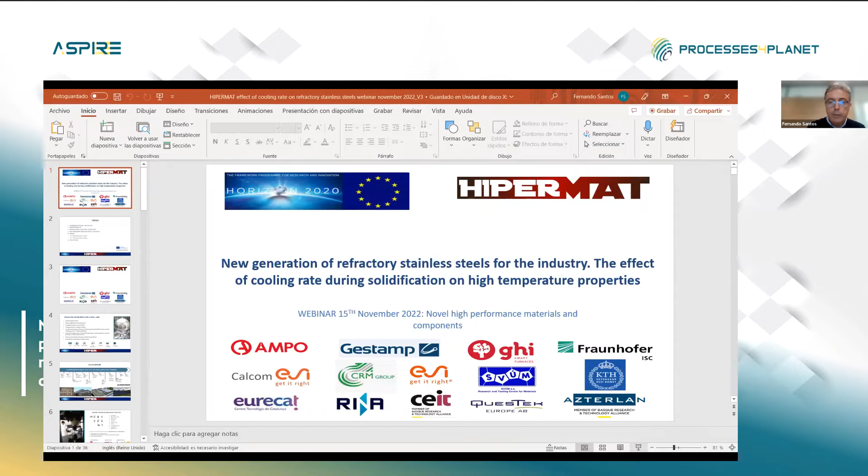We are going to present a new generation of refractory stainless steels for the industry, showing the effect of cooling rate during solidification on high temperature properties. We will go over who we are, who is Fundación AZTERLAN, give details of the HIPERMAT project, introduce the ablation technology, go over a new refractory stainless steel case study, discuss results on mechanical tests and microstructure analysis, and conclude with main conclusions.

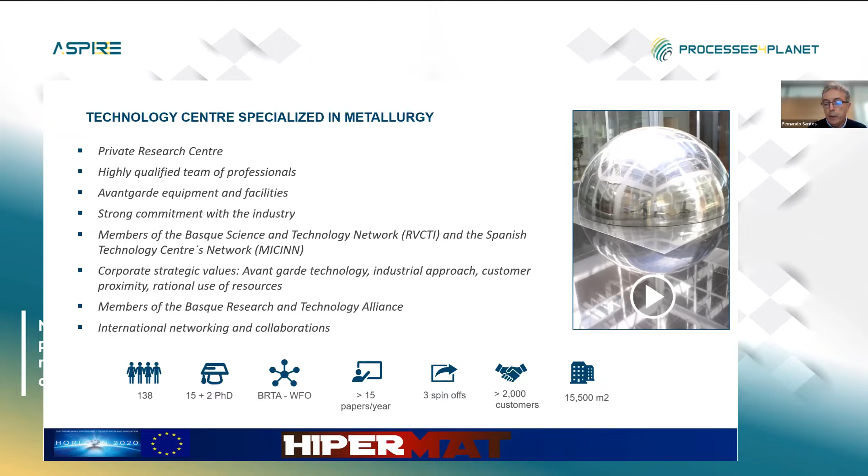Who is Fundación AZTERLAN? We are a private research center with around 138 people working here, 17 PhDs. We belong to a bigger organization, the Basque Research Technology Alliance, and are located in the north of Spain, next to the border with France. We normally generate 15 papers per year, have 3 spin-offs, more than 2,000 customers, and an active surface of 15,000 square meters. We started as a testing laboratory in 1974 and have evolved into a recognized research and development center by the Spanish government. Nowadays we carry out different activities and are quite active performing European projects.

Which are the most demanding sectors? We have a significant industrial network around us and carry out activities for sectors including iron and steel, automotive industry, wind energy, aerospace, oil and gas, urban mobility, railway, shipbuilding, machine tool, and infrastructure. We have a laboratory supporting all research and development activities, certified by different standards for automotive, aeronautic, and as a general testing laboratory.

We provide basic and applied research capabilities, mainly working on materials - we design and develop new materials. We are experts in different manufacturing processes and develop solutions for technological and control applications. We also develop transversal solutions for companies, intelligent manufacturing technologies mainly ICT tools, and work in depth on sustainability and energy, trying to solve energy and residue problems for the metal industry. We also work in other minor related areas like corrosion, surface technology, and fracture mechanics.

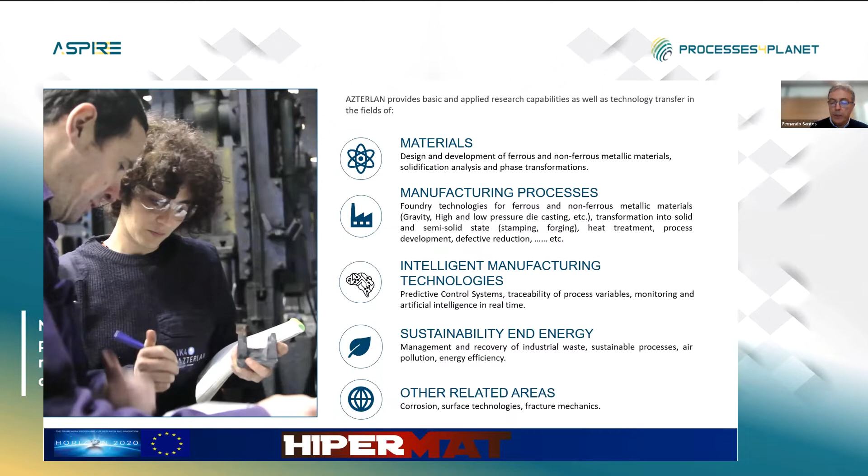Well, a quick overview of the HIPERMAT project. This project was born next to a specific study case.

It's linked with hot stamping furnaces. These furnaces have tighter requirements: they work at very high temperatures, they have to support significant loads, and the environment is quite corrosive because there are gases inside the furnace.

So currently the materials and elements inside the furnace are suffering from different types of failure modes, like thermal fatigue combined with corrosion and creep, and also wear, because they are moving and suffering quite a complex type of failure.

The project itself is a combination of solutions. It's supported by advanced design tools and aims at developing new high thermal and corrosion resistant alloys. This is one of the main aims of this topic. We are going to talk about refractory stainless steels.

We are also developing high performance alloys in terms of coatings over surfaces that are going to be exposed or suffer wear. Also critical is the control of the furnaces, and another critical aspect is the development of new embedded sensors by printing them into beams, which is the current case.

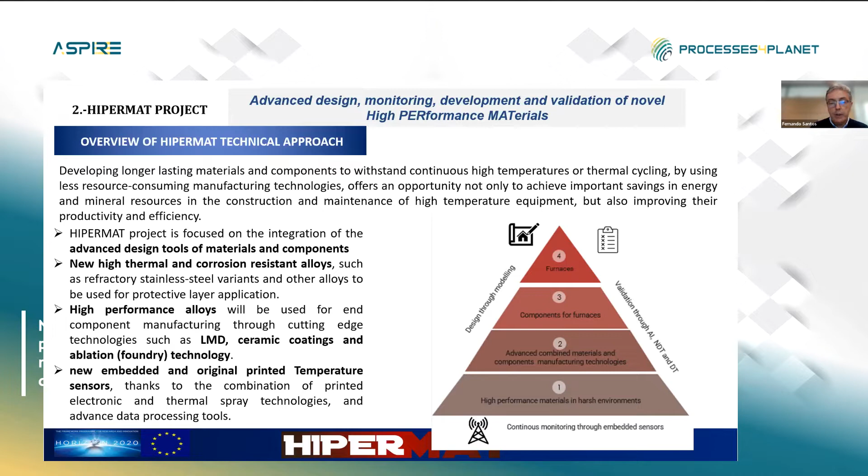Which is the main impact that we aim at having? We are trying to optimize component manufacturing processes, reducing the use of materials and increasing the efficiency of the plant, reducing plant shutdowns because of failure of different components.

Also by reducing energy and resource consumption through more efficient manufacturing technologies. This includes minimization of waste and energy consumption using modeling tools and advanced design of processes and materials, introduction of protective layers in components, reducing critical elements in bulk materials, and extending the life of these components.

Okay, and now we'll go on. I will give the floor to Emily Barbarias, who will go over the ablation technology. He is a senior researcher at Fundación AZTERLAN, developing his activities in the aluminum line. He is a mechanical engineer with 20 years of experience in the metal industry, and he is developing new manufacturing solutions for metallic components, such as ablation, which in the project we also call hydrosolidification. So I will give him the floor.

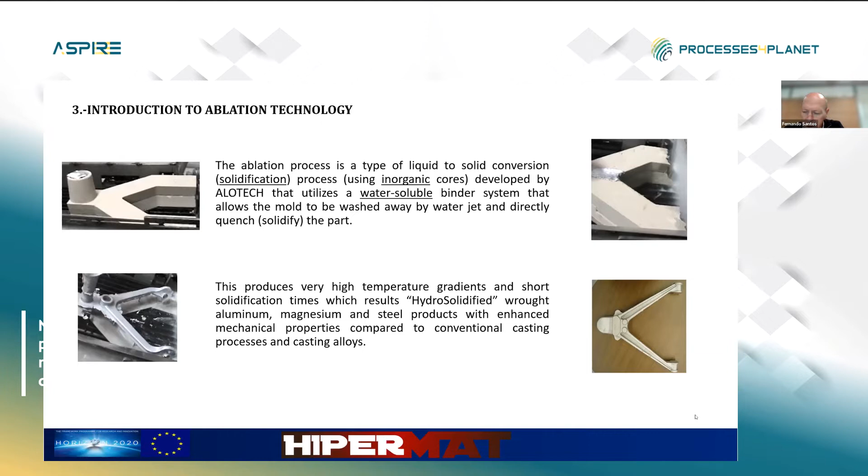Okay, by making a short comparison to clarify the ideas: in conventional casting, the melt fills the cavity, and during the filling, the melt is losing energy towards the mold. At the end of the melt filling, we have a skin of the mold that has been heated, and slowly, by the thermal transfer coefficient, this heat moves towards the rest of the mold.

So in conventional casting, the process is a compromise about the mold's properties. During the filling of the part, we'd like to have something which is adiabatic, which takes out as little energy as possible. In the opposite, once solidification starts, we would desire a higher degree of heat transfer.

So at the end of the day, in casting we have a kind of compromise between those two processes, and somehow the technology, the parts, and the geometry adapt to each other. Everybody knows more or less what geometry can be cast or not, and we go through those equilibriums.

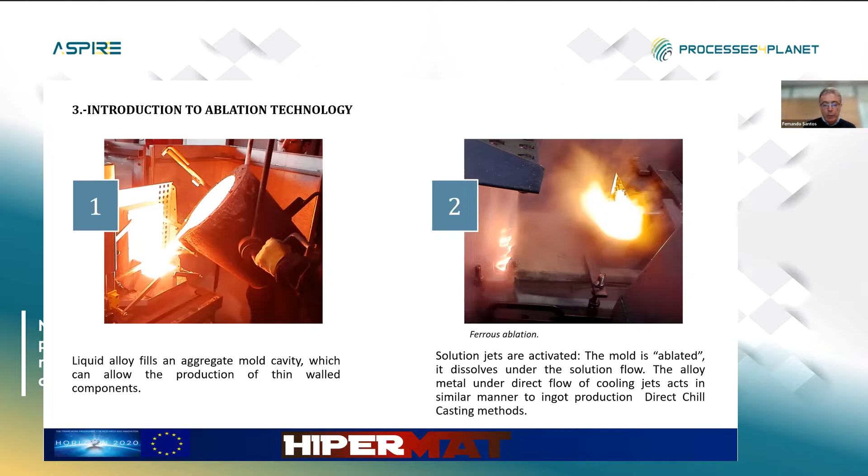So now we will move ahead. The next point is the new refractory stainless steel case study. The rolling beam is a furnace based on a technology where we have different metallic beams supported on rollers with rings. This equipment works under fluctuating high temperature conditions at the entrance of the furnace, whereas in the center we have a quite constant temperature, higher than at the entrance. That makes it so that under these conditions, failure modes are thermal fatigue of beams at the entrance of the furnace, combined with corrosion and creep inside the furnace, and combined corrosion, creep, and wear of rings.

So this is something we have evaluated, the main conditions. We are going to focus on the beam inside the furnace, which currently represents a quite regular failure mode that generates shutdowns in the plant. The goal has been to improve creep mainly and crack growth rate. These are the two main issues affecting these beams.

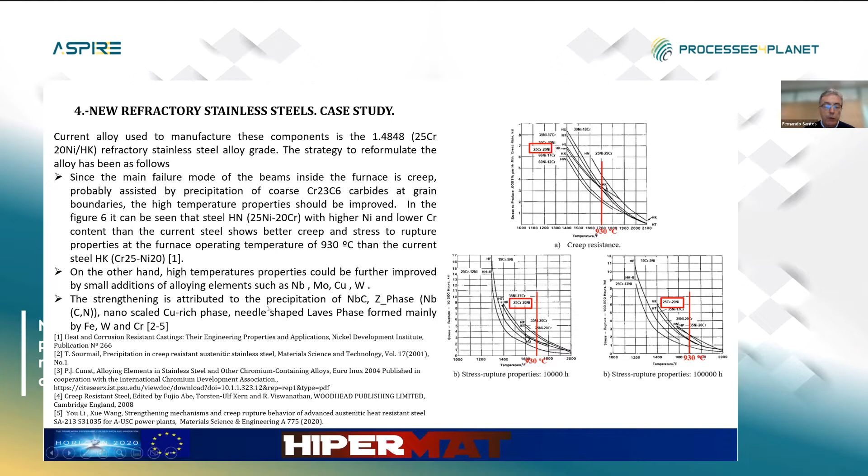When we studied the different qualities of various alloys used in the industry, we took the more standard alloy as reference, and studied how the different chemical elements, the process, and the phases affect these materials. We made a quite complex study supported by different partners, and in the end we checked that higher nickel contents improve the properties, and other chemical elements improve them with minor additions like niobium, molybdenum, copper, and tungsten. We also checked why this happens, and it is because of the precipitation of different phases or the formation of others. This has been a bit the way of working on this.

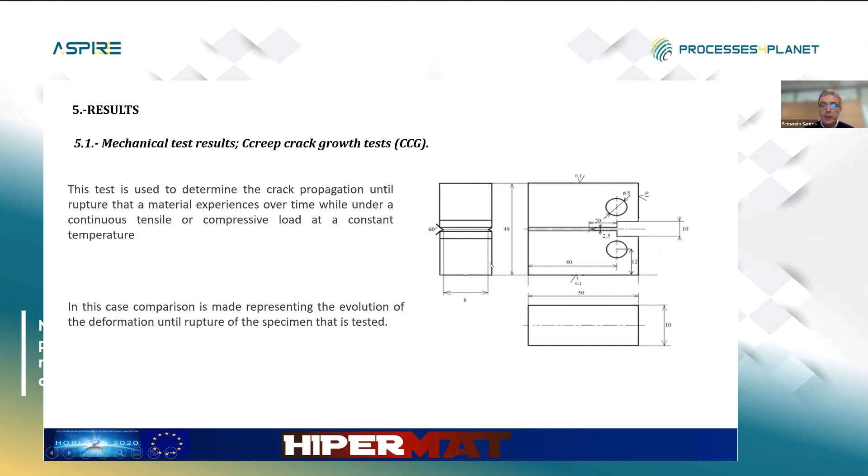We have tried to investigate and analyze the reason for this behavior. We've gone over the analysis by means of SEM, EDX, looking at the quantity of primary and secondary carbides, the morphology and chemical composition of carbides, and the segregations in grain boundaries.

What we have seen is that first we performed a stabilization heat treatment, because the condition of the alloy changes with time. If we keep it at 930 degrees for some time, there is significant precipitation of carbides. So we carried out this stabilization heat treatment.

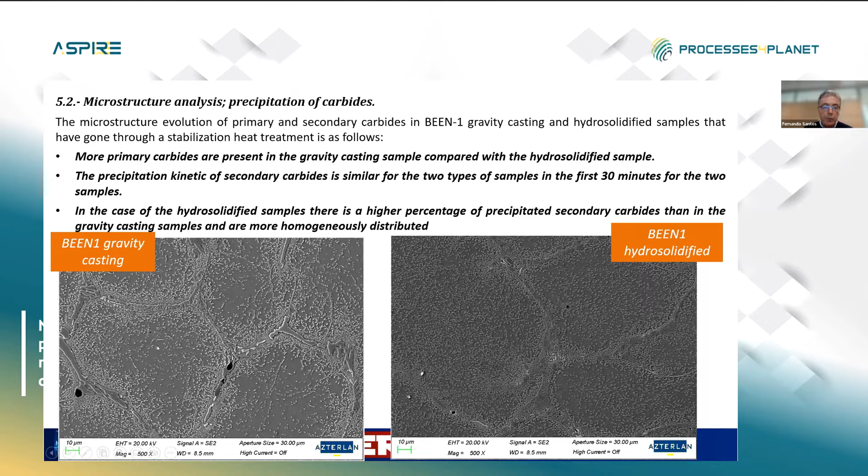Down in the pictures, we can see how primary carbides, the biggest ones, are similar in grain boundaries, but secondary carbides, the tiny ones inside the grains, are more homogeneously distributed in the hydrosolidified sample.

If we look at the morphology in the standard samples cooled down in the mold, we see these blocky type carbides in grain boundaries, whereas the shape of carbides changed completely in the hydrosolidified samples. It looks like a fishbone appearance.

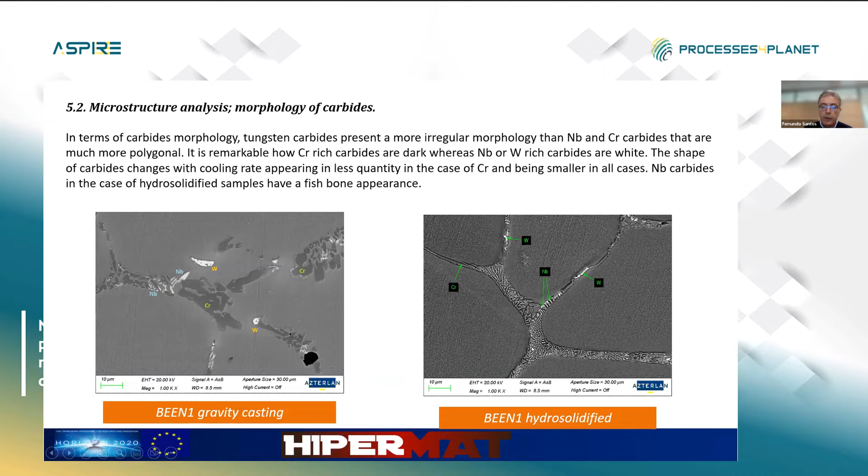They are tiny, and they are better distributed. This is quite significant.

The chemical composition of carbides is also slightly different. We have carbides richer in elements like chromium, niobium, and tungsten in the case of gravity castings compared with hydrosolidified samples. This makes sense, as we have less segregation in the case of hydrosolidified samples.

We made line scans to check the segregation. We found that chrome is more segregated in the gravity castings, whereas it's less segregated in the hydrosolidified case. Carbon also is more segregated in the dendritic spaces in the case of gravity casting. And the stabilization time has no effect on the segregation.

So this is what we can see in the next pictures - these are the line scans. What can be seen is that there is lower segregation if we cool down quicker, compared to keeping the metal in a mold that cools down slower.

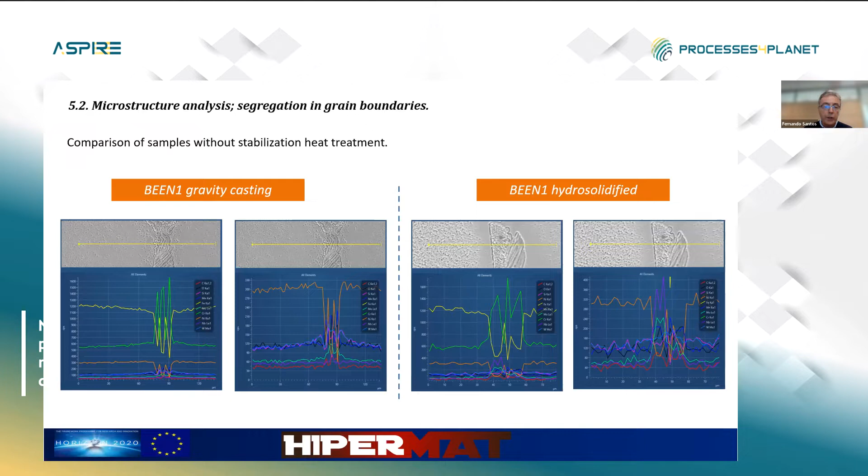So this is the general picture, and we'll go to the conclusions. Hydrosolidification has a significant effect on creep properties, improving them significantly, in both the standard alloy and the new formulated alloys.

Also, the chemical composition modification that we have performed has a significant effect on creep properties, and in fact it affects a lot on creep and on crack growth rate.

Regarding microstructure, as we have seen, it's quite remarkable how primary carbides are present in the gravity casting sample in a higher quantity compared with the hydrosolidified samples. The precipitation kinetic of secondary carbides is similar for both types of samples in the first 30 minutes. In the case of the hydrosolidified samples, there is a higher percentage of precipitated secondary carbides.

Also, it's remarkable how the different carbides are richer in the main alloying elements in the case of gravity casting compared with hydrosolidified samples. We can also see how tungsten carbides are more irregular than chrome and niobium carbides, which are more polygonal, that chrome and carbon are more segregated in the case of gravity casting, and that the stabilization time has no effect on segregation of the different chemical elements.

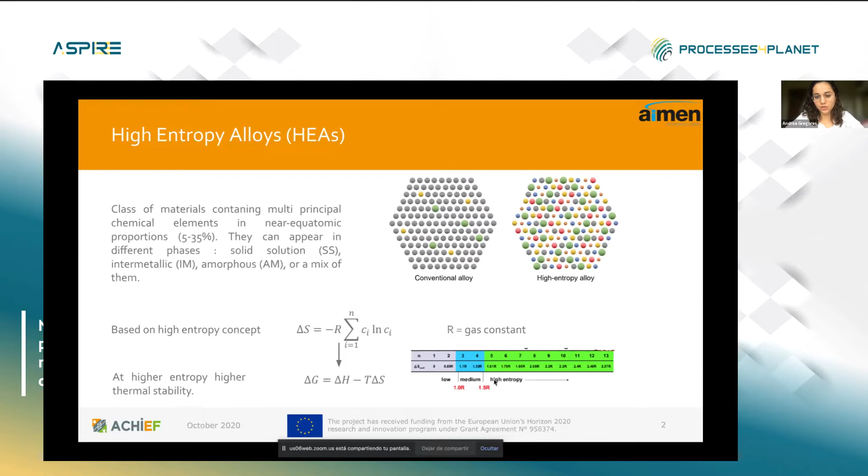High entropy alloys are of great interest for some industrial applications, such as in aeronautics, because of their strength and superior hardness. They have really interesting properties. But because they can present multi-principal chemical elements, this gives rise to a lot of possible combinations, so discovering a new high entropy alloy is really difficult.

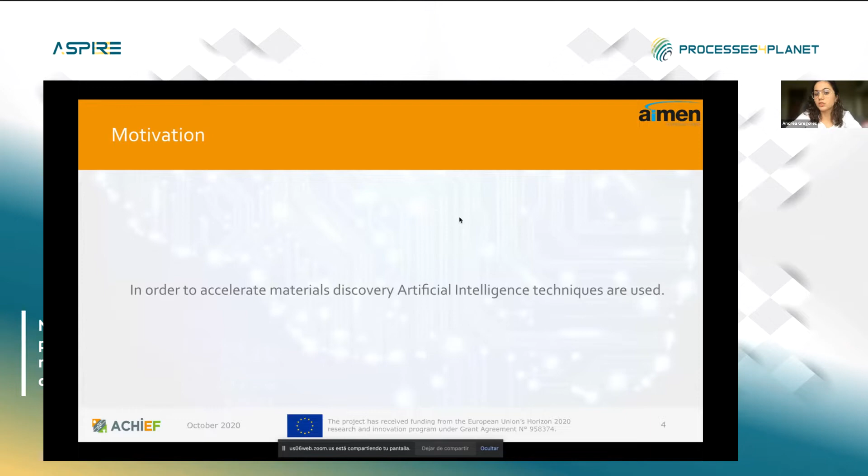Experimentally, it's really hard to deal with this amount of possible combinations to check, and computationally it's really costly. So one of the motivations of this ACHIEF project is to use artificial intelligence in order to accelerate this process of discovering new high entropy alloys.

So the methodology was as follows. First, a dataset was created based on literature. Once this dataset was finished, it was used to feed the neural network, and we trained the neural network with this dataset. Once the neural network was correctly trained, it was able to generate some candidates to be possible high entropy alloys.

But in order to check if they could accomplish the properties of these concrete alloys, a validation method was developed. In this case, we made use of databases based on density functional theory to check if they had the properties to be high entropy alloys.

Concretely, focusing on the first step, the dataset ended with more or less 1,000 high entropy alloys found in literature, and each alloy has 15 related physical features that describe its behavior. Then a column with the number of elements contained in each alloy, its general phase—which, as I said before, can be solid solution, intermetallic, amorphous, or a mix of them—and in the particular case of solid solution ones, its specific solid solution phase was also specified, which could be, for example, FCC or BCC structure.

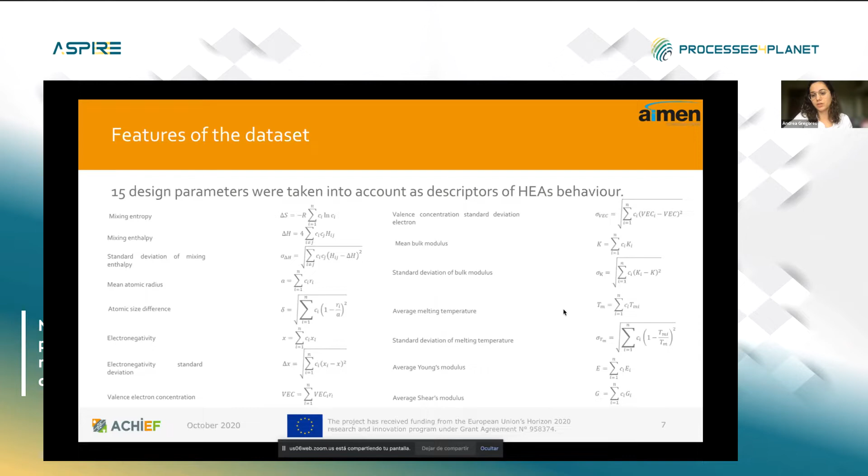So once the dataset was developed, well structured and pre-processed, everything is okay, it's ready to be used. The next step was the neural network.

In this particular case, we wanted to generate new synthetic candidates, so we made use of generative adversarial networks, which are a kind of network that contains two networks inside: the generator and the discriminator. This works as follows.

First, the generator is fed with the dataset with the real samples and a noise. With this, it is able to generate some synthetic samples, which are used as input for the discriminator.

Then the discriminator compares these synthetic samples with the real ones and determines if they are real, meaning similar to the real ones in the distributions they follow, or fake, if they are really different.

This works as a loop where the discriminator helps the generator calibrate its weights in each iteration. So in each iteration, the generator is improving the generation of better candidates. Once the neural network is correctly trained, the discriminator will not be able to distinguish between the dataset and the generated samples.

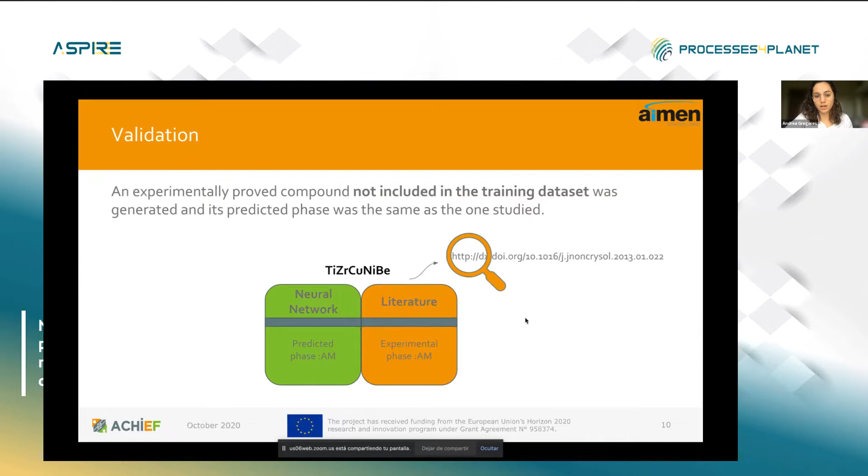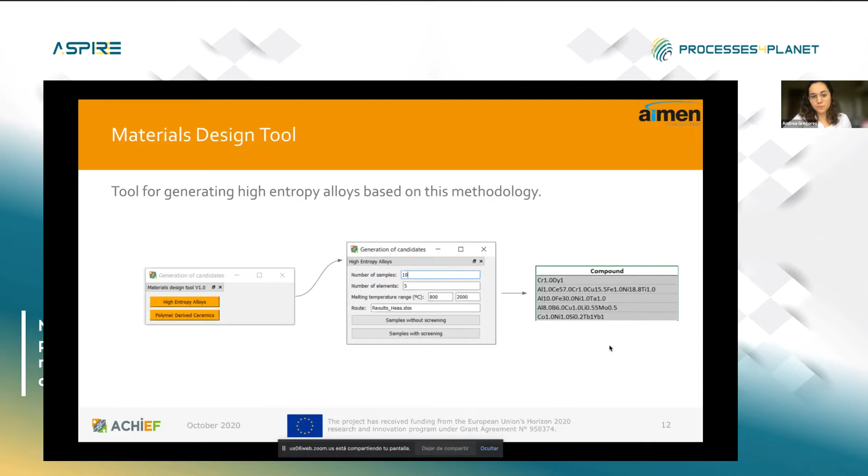Finally, in order to send our data to VTT for the simulation part, where the final high entropy alloy will be chosen, we have done a screening part in terms of making it easier for them to analyze, just not to send a lot of data.

So first of all, the first approach was to take into account 78 chemical elements, where we removed noble gases and radioactive elements. But then we did another screening: we removed the rare earth elements, the toxic ones, expensive ones, just to not make it dangerous when manipulating them in the laboratory, and also because of costs. We also removed elements with a melting temperature higher than 2000 Celsius degrees, because it's also difficult to deal with them in the laboratory. So finally, we ended with 19 chemical elements to be possible parts of the high entropy alloys.

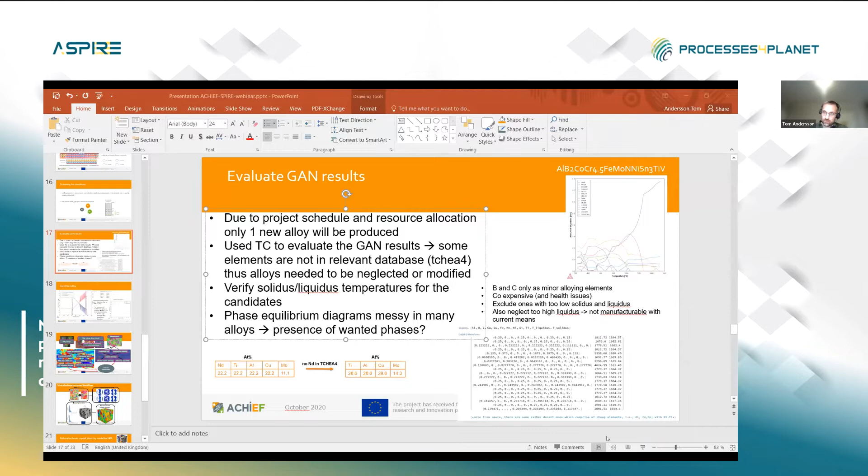So following AIMEN's neural network analysis, we'll continue with the selection of the most promising alloys. So the actual use case here is this kind of steel mill roll component, and the temperatures in the operation are up to 1200 degrees, or almost to 1200 degrees.

So we need to have this kind of high temperature alloy, and due to the schedule of this project, we only had the chance to manufacture one alloy, so we had to be quite sure that alloy actually will be usable in these kinds of high temperature applications. So we used ThermoCalc to evaluate these neural network results, and the database we used was this high entropy alloy database number 4.

But some of the elements that remained in the neural network were missing from this database, so we had to modify those alloys a bit or neglect some of them. We also used ThermoCalc to verify the solidus or liquidus temperatures for the alloys, and in some cases these alloy temperatures differed a bit from the design parameters used in the neural network. And in the end, the phase equilibrium diagrams were quite messy for some of the alloys, so those were basically neglected.

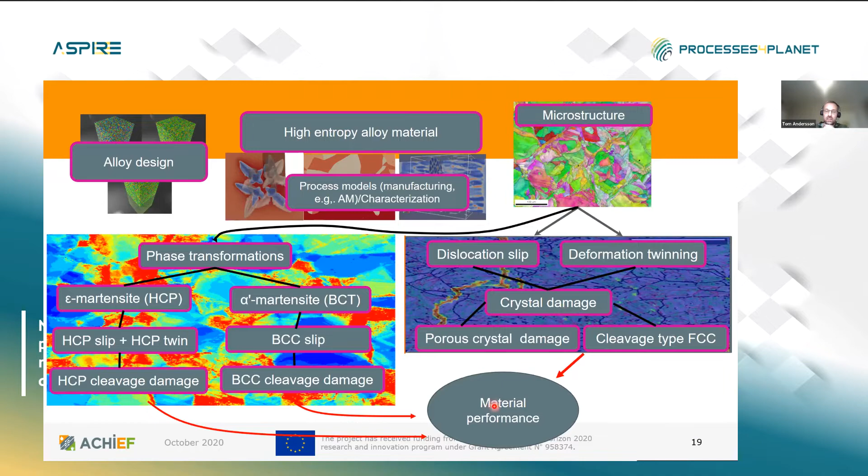So when we have the microstructure and the predicted deformation mechanisms, we apply this crystal plasticity model to get the behavior and ultimately the material performance. Here is an example of how we are going to do that microstructure.

We have the characterization data, take the orientation distribution from that, and create a synthetic representative volume element—a representative material block that has the same orientation distribution as the real material. We use that for this crystal plasticity analysis.

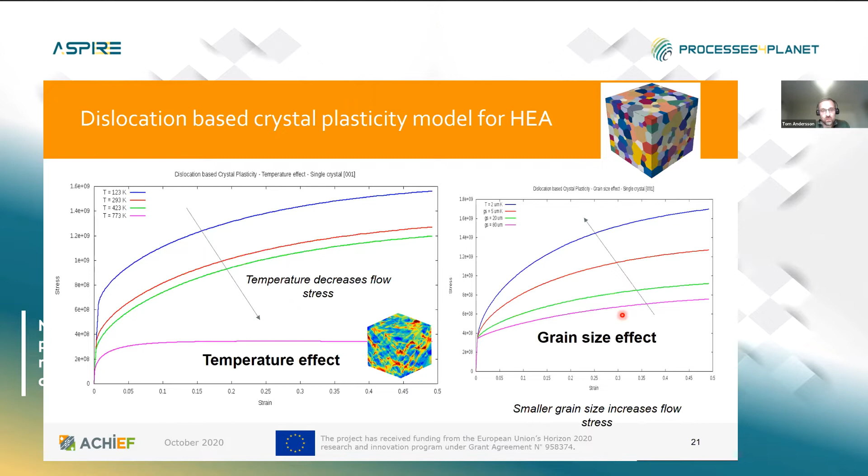Basically what we can do is see some trends, how temperature would affect it, and also the grain size, among other things. Those are the most important parameters in this case, and here's an example of what we have done previously.

By modifying the microstructure, we can see these trends of how it will affect the load carrying capacity, and in this case creep is the most important deformation mechanism. We will try to apply this for creep, to see how different microstructural features affect the performance of the material.

I think I'm at the end of my time. So that was in brief what we have done in this ACHIEF project. Thank you.

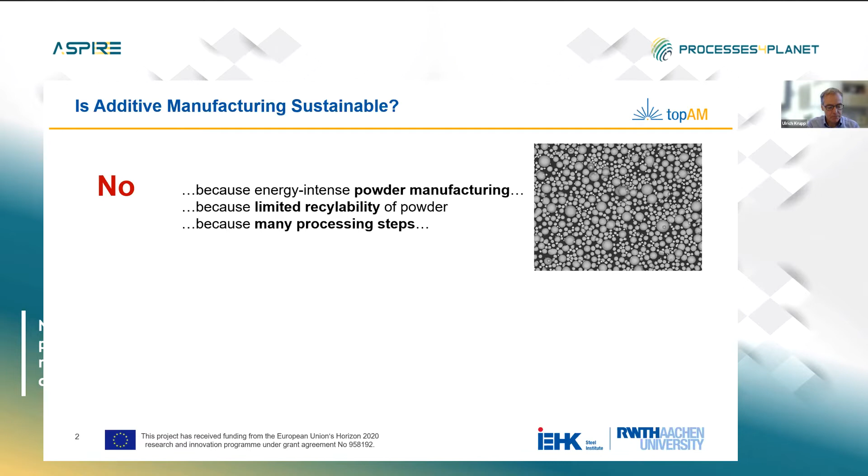We usually have many processing steps, starting from atomization, and often post-processing like hot isostatic pressing and so on. But nevertheless, I would say the answer is yes—additive manufacturing can be sustainable because of the potential for high functional integration. Think about titanium—we can achieve high material efficiency, having material only where it's needed, and lot sizes of just one are possible. That makes it economically feasible and highly sustainable.

A good example of where it can be sustainable, and where topAM, our project, comes into the game, is gas burner heads in process engineering. These gas burner heads are exposed to high temperature, aggressive environments, high gas flows, thermomechanical loading, and reducing and oxidizing environments. There is high potential for improvements in terms of increasing service life, optimizing gas flow characteristics, and increasing temperature, so that by using additive manufacturing we may end up with higher efficiency in process engineering steps.

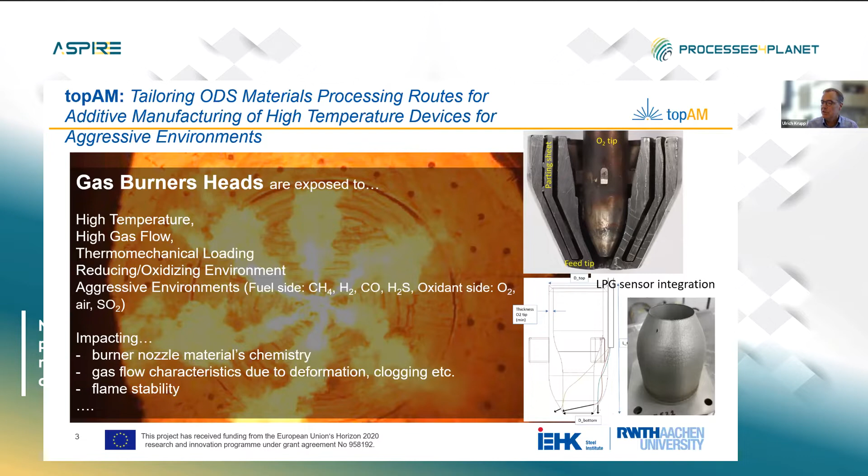These gas burner heads operate at very high temperatures—as we heard before, temperatures go up to 1300 centigrade. That is an example of our new design of the oxygen tip of such a gas burner head. What we're trying to do is integrate sensors to get data from inside the process, such as temperature, and that can be done by additive manufacturing.

High temperature stability can be obtained by creep-resistant materials at these high temperatures, different from the approaches introduced before. We are aiming at ODS materials, oxide dispersed strengthened materials. This means we have to implement nano-sized precipitates which must be of very high thermal stability, so that they do not grow bigger during service at high temperature.

That is only possible either by strictly controlling the chemical composition, or by mixing hard oxides as an alloy powder. Here you see an example of a mechanically alloyed material, so mechanical alloying in combination with hot extrusion - that is today's method to produce bulk ODS materials.

We are developing alternative approaches for additive manufacturing, which I will introduce later - freeze granulation, high energy milling, and internal oxidation and nitridation. We are aiming at three different alloys: nickel-based superalloys, alloy 602 and 699; an iron-chromium-aluminum high temperature alloy, Kanthal AM100; and for somewhat lower temperatures, alloy 400, a Monel-type alloy, which showed in a preliminary study excellent resistance to metal dusting.

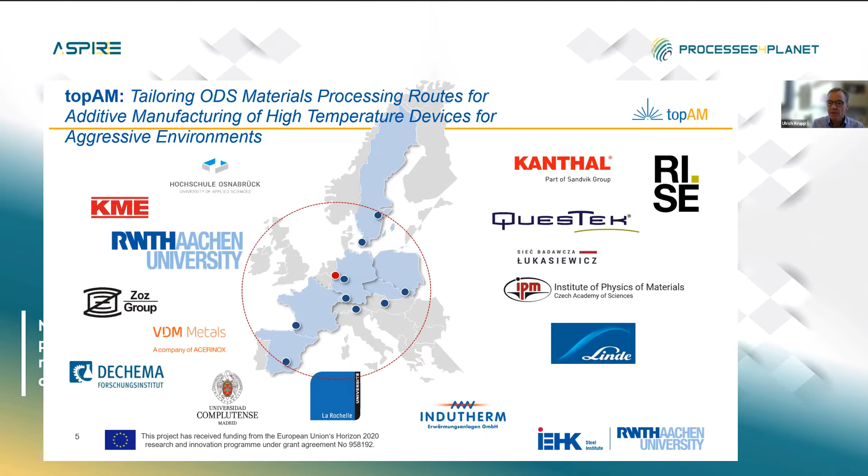This means we are able to represent the complete value chain in additive manufacturing, where we start with computer-aided design, then data compilation and optimization for additive manufacturing. We have the powder production by means of gas atomization, powder preparation - here it includes implementation of the oxide particles - then actually additive manufacturing, using laser powder bed fusion, and finally component testing.

Let me start introducing the gas atomization process. The alloy is molten in an induction furnace, and by high pressure argon, the melt is sprayed into a large stainless steel vessel, so the solidified droplets become later the powder that can be seen here - this is a high-speed camera.

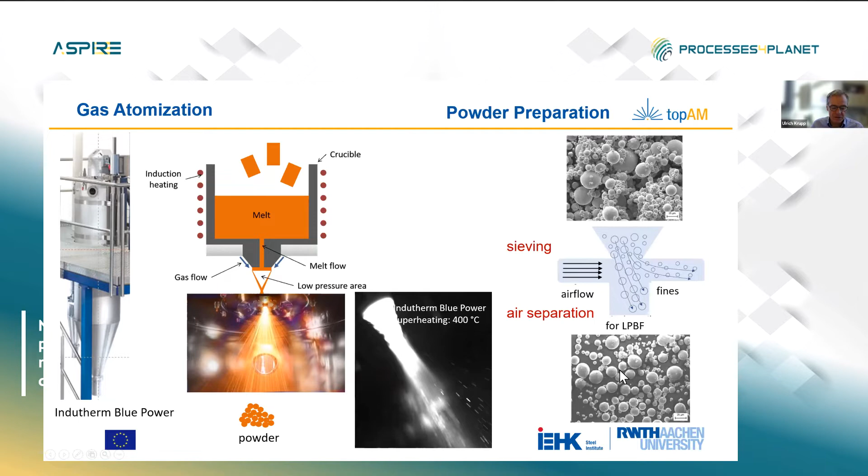Here the atomization starts, and you see the droplets which then solidify and become the powder. The raw powder then has to be prepared by means of sieving to remove the coarse powder particles, and then we use air separation to get rid of the powder fines - that gives a suitable powder for laser powder bed fusion.

Then the process starts again with the laser melting, and so the component is constructed layer-wise by laser melting. Finally, you have to remove the remaining powder, and the part needs to be removed from the building platform.

The main parameters are the laser power, the velocity, layer thickness, hatch distance, and the absorption of the laser beam. This is a very dynamic process that determines the microstructure of the material.

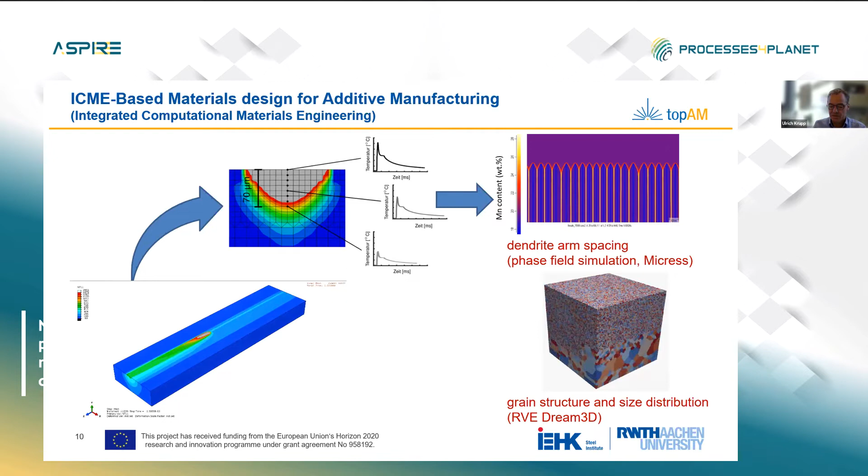The next slide shows a sketch of the whole ICME approach - ICME stands for Integrated Computational Materials Engineering. As mentioned, we use Micress to get the microstructure, while a second flow predicts the nanoparticle melt pool drift to get our particle distribution. Together these should let us predict the mechanical properties, and finally predict the performance, which is also the last work package in topAM - performance testing.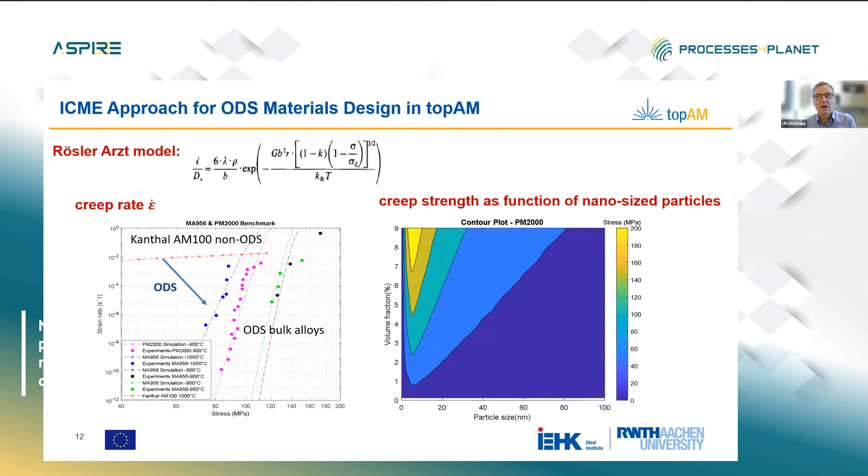And that allows us to use computational thermodynamics, and we get the volume fraction and the particle size. We see an optimum that is somewhat below 10 nanometers, so that means we really need very small particles.

So we are using three ways to get small particles in the material. The first is high energy milling of the ceramic material in combination with a metallic powder. This shows one example done with an aluminum alloy, where you see those small grains and then the nano-sized particles.

Another way we are exploring is internal oxidation and nitridation by adjusting the oxygen or nitrogen pressure in a fluidized bed system. We can obtain nanoscale alumina or, for instance, titanium nitride particles, and they stay stable when applied to the operation environment in process engineering.

The next example is freeze granulation. Here we use the fine particles from the air separation process, processed together with a binder and water, and the system is then frozen.

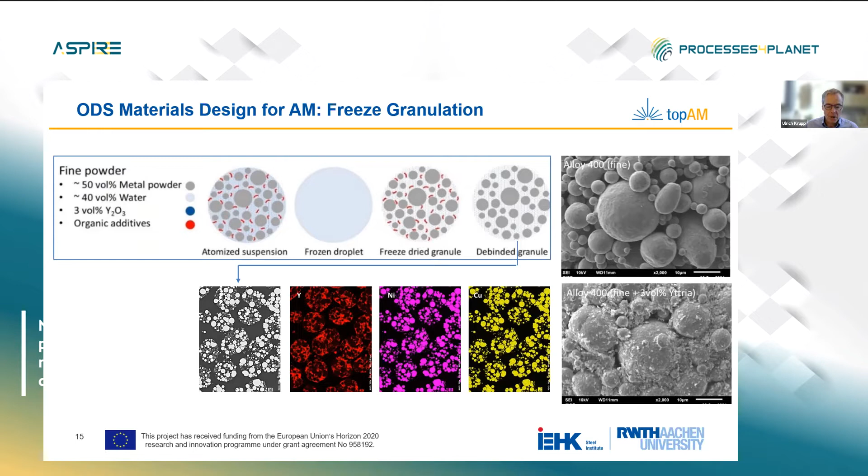Finally, I'd like to show our characterization work. We are doing creep testing and high temperature corrosion testing within the consortium. Right now our unmodified laser powder bed fusion alloys have rather the same properties as bulk alloys, but with ODS we are aiming at much lower creep rates.

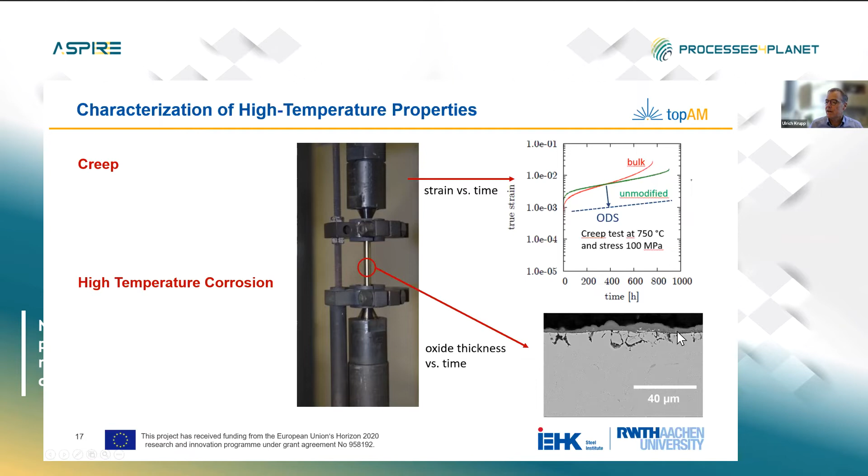At the same time we have to achieve high oxidation resistance, which is maintained in this case by the alloy 699XA through a thin chromia scale. We have some internal oxidation, and these are the two main characterization steps.

Let me summarize this short overview of what we are doing in TOPAM. Additive manufacturing can contribute to sustainability if we can improve the performance of individual components. That means we need to develop AM-specific metal powder materials, and I hope I could show you a way to systematically use ICME-guided materials design for additive manufacturing, and how it can be used for demanding components in process engineering to achieve higher efficiency and longer life for applications under extreme conditions.

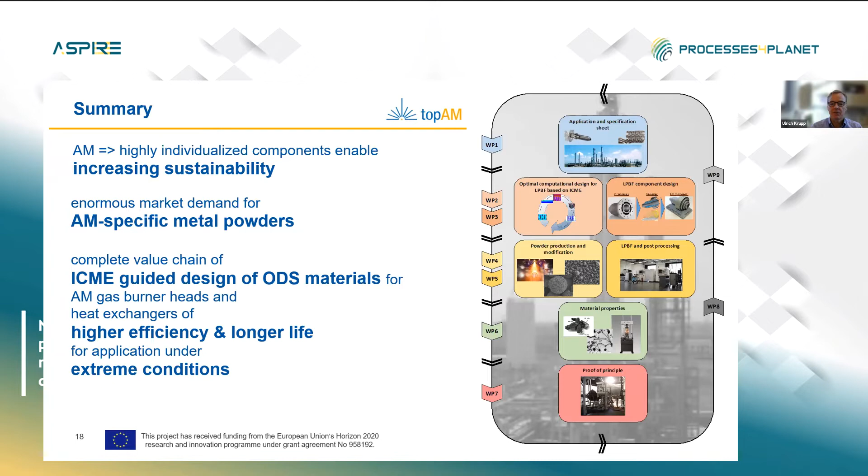With that, I would like to thank you, and also mention that in the framework of TOPAM we are organizing summer schools, which are open to the community. If you're interested, just contact us. That's the end of my presentation, thank you all for listening.

Thank you very much, Ulrich. Very interesting presentation, really.

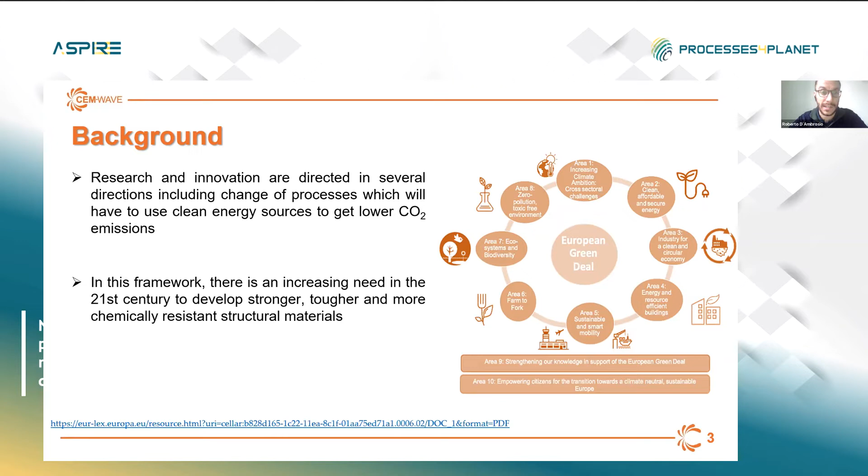In such context, research and innovation are directed in several directions, including the change of processes to get lower CO2 emissions, and this will require, among others, novel material solutions to address the more fluctuating and harsh environments expected. For energy-intensive industries, where very high temperatures in controlled atmosphere have to be reached, the industries will need to follow one or more low-emission pathways.

In particular, concerning the steel industry, the main tenet will be to use energy inputs provided from circular carbon technologies, fossil fuels with carbon capture and storage, and clean power for hydrogen-based iron-making processes.

As an example, in steel processing lines, indirect heating of products is usually carried out by using radiant tubes equipped with gas-fired burners. These components are usually based on different grades of Inconel stainless steel, which, depending on the location, are exposed to severe thermal loads up to their temperature limit.

However, due to the expected shift to renewable energy sources involving mixtures of hydrogen and biomethane up in the future to 100% hydrogen content, novel materials will be required, not only able to sustain these extreme conditions, but also phenomena like hydrogen embrittlement for metals or hydrothermal attack for ceramics.

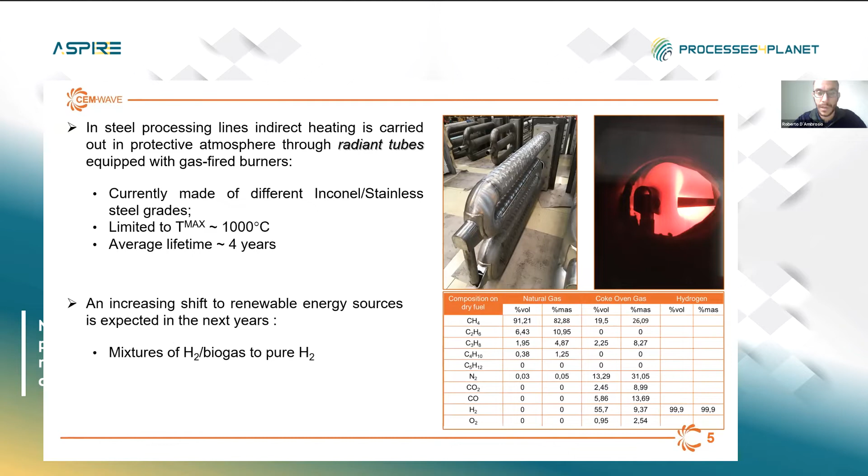In this framework, ceramic matrix composites could play an important role due to their high toughness, low density, high thermal stress resistance, and chemical inertness, which are making them increasingly attractive in a large palette of energy-intensive applications.

These materials could be distinguished into oxide and non-oxide-based CMCs, depending on the main components, namely the fiber and the matrix, which could be based either on an oxide material such as alumina, or a non-oxide material such as silicon carbide. However, due to the high raw material and processing costs, CMCs are only employed in high-end areas.

Therefore, in CEM-WAVE, our first aim is to introduce an innovative microwave-assisted chemical vapor infiltration technology to manufacture CMCs. Moreover, the final goal of the project will be to validate a CMC prototype based on a joint oxide and non-oxide CMC tube, to be tested in the relevant environments of interest for future radiant tube furnaces in steel industries.

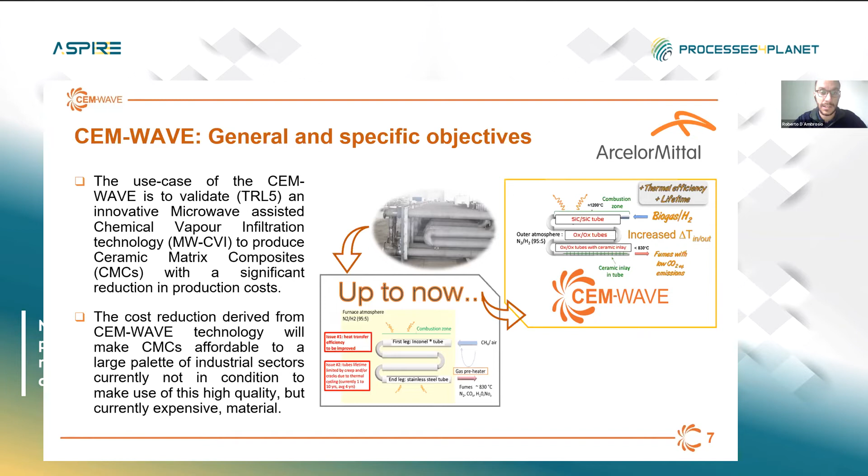Moreover, as part of the project activities, a series of tasks will be carried out to investigate more enabling technologies to favor a wider application of these materials in additional sectors. In order to reach all these goals, the CEM-WAVE Consortium gathers a team of 13 partners among academics and industries, joining all the relevant expertise in all the project fields.

I will start now by going more in detail into the microwave CVI technology. Let's start by saying that commonly CMCs are fabricated by infiltration methods. Among those techniques, chemical vapor infiltration, or CVI, is one of the most preferred, since it allows obtaining the highest quality matrix in terms of resulting thermomechanical properties.

Specifically in this process, a gaseous ceramic precursor infiltrates a porous fiber structure and reacts at high temperature on the fiber surface, depositing a ceramic layer. However, in conventional isothermal isobaric CVI, high vacuum levels are needed to favor the penetration of the reactive gases inside the preform, leading to a strong depression of reaction kinetics, with resulting processing times also of several weeks to achieve the final density.

So one of the solutions to overcome the low deposition rates observed in conventional CVI is through the application of thermal gradients within the preform.

In this framework, the usage of microwave-assisted heating is therefore an attractive alternative due to the peculiar volumetric heating mechanism, which, coupled with surface heat losses, results in an inverse temperature profile in the sample. In this way, the infiltration can start from the heart of the preform, moving towards the external surface as the density of the material increases.

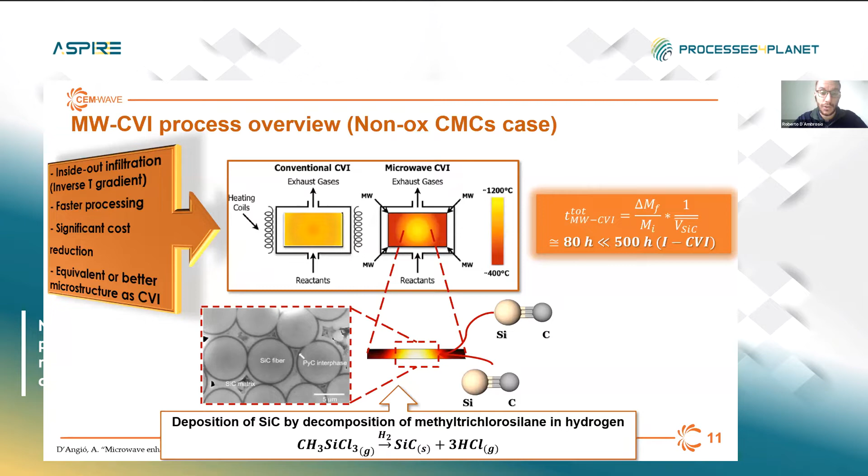Nevertheless, the application of microwave heating leads to additional challenges for the effective processing of materials. Among them, the two main challenges regard the non-uniform heating due to the formation of standing waves inside the cavity, with the resulting heterogeneous heating, and the control and optimization in operando of the microwave heating parameters, which need to be finely tuned with the material properties changing during the process.

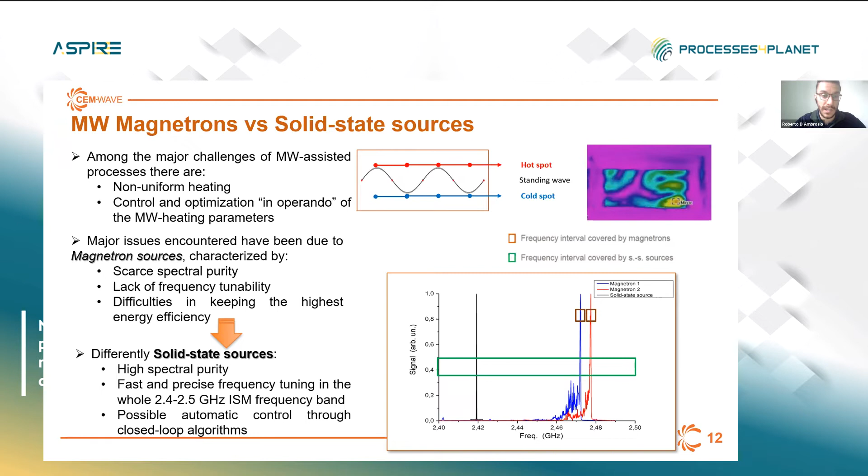Differently, with the newest microwave solid-state sources, both the forward and reflected power levels can be easily adapted into the whole frequency band of interest, with the further possibility to implement closed-loop controls in order to automate the whole infiltration process. Therefore, one of the main advancements in the framework of the CEM-WAVE project has been the design, development, and integration of these new microwave solid-state sources to our microwave CVI plants.

As an example, a first ever developed prototype able to deliver a total of 6 kilowatts of microwave power to our reactor has been developed by our partner Fricke und Mallah.

Here, I'm showing you a panoramic view of the microwave CVI plants with the solid-state sources highlighted, which have been integrated to our systems, and will be respectively dedicated to the manufacturing of non-oxide-based CMCs and oxide-based CMCs.

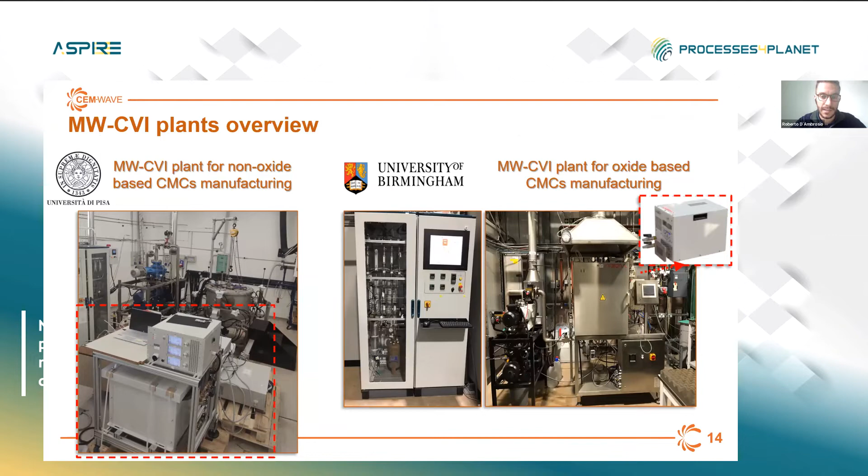Another major advantage coming from the application of this new technology derives from the solution of the coupled electromagnetic-thermal problem by rigorous numerical modeling, carried out by the Institute for Chemical-Physical Processes in Pisa. In this way, the most efficient operational conditions can be identified in terms of the resulting operating frequencies.

These frequencies have been chosen following three different criteria: the achievement of the highest energy efficiency in terms of energy deposited in the sample, the selection of modes with electromagnetic field distribution suitable for the application of interest, and the minimized cross-coupling level in terms of reflection of power in the other channels, which is inevitable when working with more than one source at the same time.

The main outcome of the modeling will be the temperature profile in the sample region as a function of the electromagnetic field frequency, determined looking for two main targets: the improvement of the heating uniformity to favor a wider densification of the material, and the tailoring of the necessary temperature gradients to achieve the characteristic inside-out densification of our CMCs.

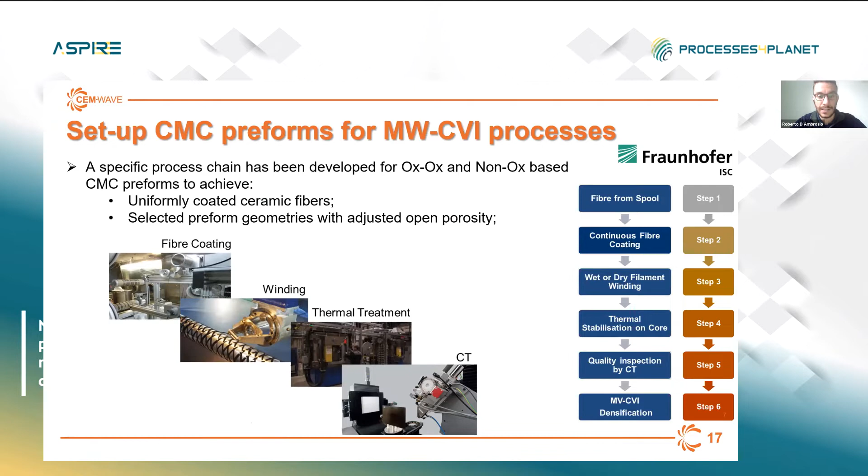Another major task regards the preparation of the CMC preforms for the microwave CVI processes. A specific process chain has been developed for both categories of material at the Fraunhofer Institute of Bayreuth, developing CMC preforms based on uniformly coated fibers with selected preform geometries and adjusted open porosity to favor the penetration of the reactive gases during infiltration.

The first step involved the interface coating of the ceramic fibers, done in a roll-to-roll process by a wet chemical route, achieving very uniform coating of the ceramic fibers in a short time span and continuously. The interface is a very crucial component for a CMC material, since by controlling the bonding strength between the fiber and the matrix through the interposition of this layer, it is possible to activate a series of toughening mechanisms under stress, resulting in its characteristic pseudoductile fracture behavior.

Here I'm showing you the coating systems which have been employed for both categories of materials.

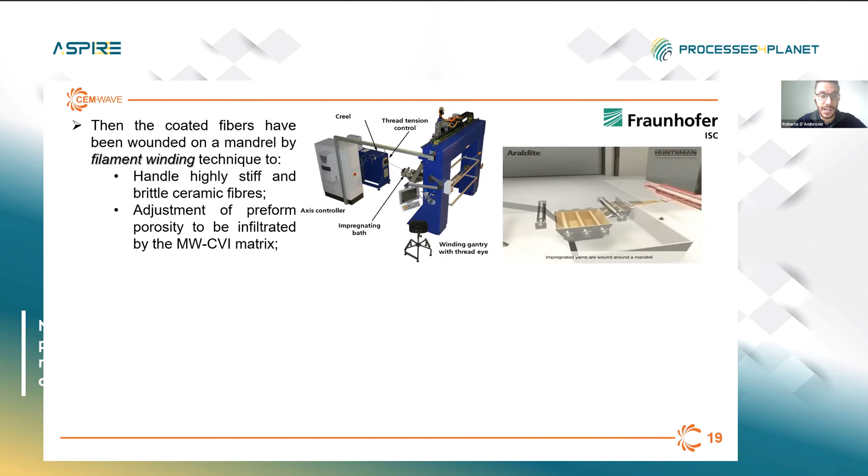Following the next step, the coated fibers have been impregnated, passing them through a bath with a ceramic slurry, and winding them on a specific core depending on the final geometry, using the filament winding technique. Why this technique? Because it allows a very fine adjustment of the fiber reinforcing architecture, and because it is not easy to handle stiff ceramic fiber rovings such as our coated ceramic fibers.

Once the textile processing parameters were optimized, the preforms have been thoroughly dried and thermally treated to remove them from the cores, obtaining the final geometries here displayed, which had tubular and plate-shaped geometries for both categories of materials.

Coming now to the microwave heating and infiltration process trials, these activities are being carried out in these months. The first results obtained from microwave heating trials immediately showed very interesting results using the latest solid-state sources previously described. These trials have been carried out monitoring the temperature profile evolution on a typical sample after 5 minutes, using single port excitation.

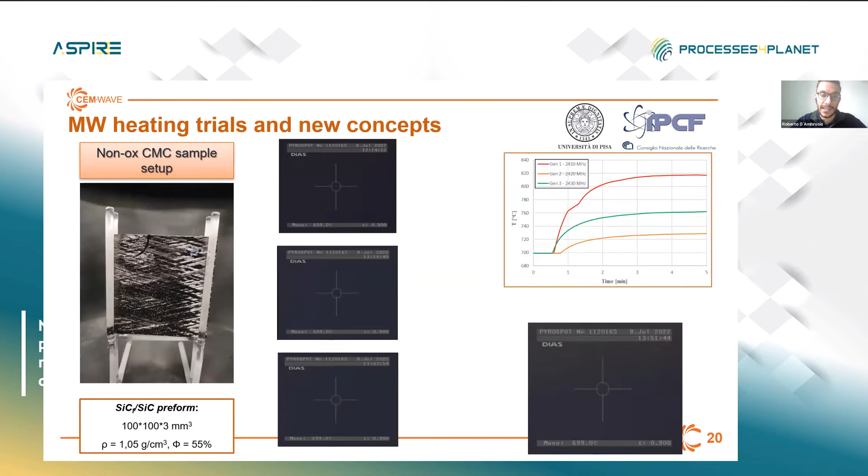As you can see, by finely selecting the operating frequency, we have been able to selectively heat specific sample regions covering from 30 to 50% of the whole material surface.

But look what happened when we combine these three conditions using a multi-port, multi-frequency approach. You can see that in this way, the heated surface of the material rises to about 70 to 80%.

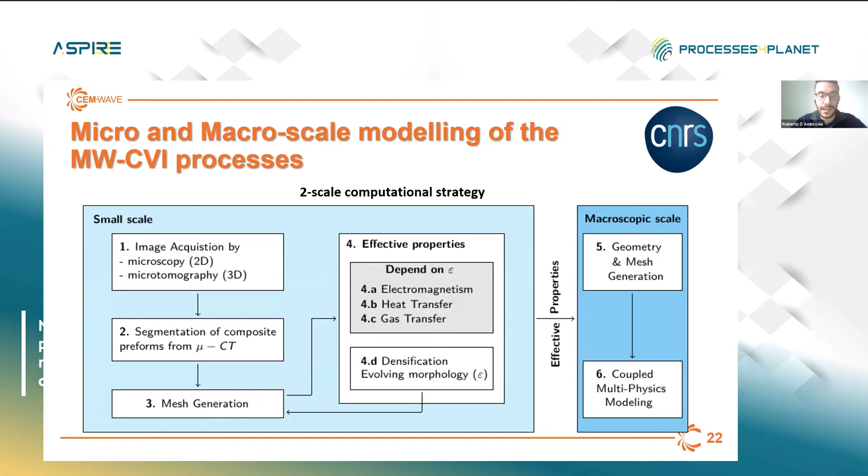Another crucial activity regarded the multi-physics, multi-scale model of the microwave CVI processes, carried out at CNRS in Bordeaux. Here is depicted the modeling strategy, which covered 2 different scales, from the intra-fiber bundle scale of tens of microns up to the whole part scale.

You can see that in order to model the microwave CVI process, we need to solve the conservation equations for 3 different physical problems. We also need to know the laws providing the change of the geometrical and transfer properties during the infiltration process.

So the first task dealt with the collection of a series of image data coming from X-ray computerized tomographic scans and SEM micrographs, which have been processed by specific tools in order to detect the precise fiber reinforcement architecture.

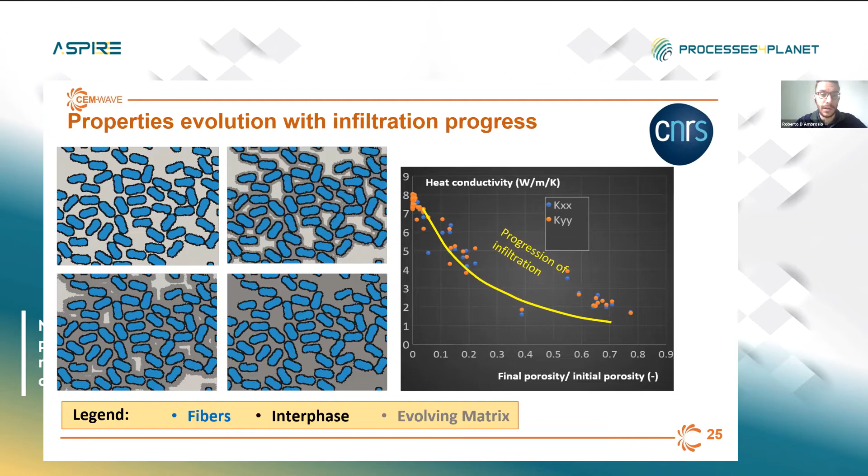Once we obtained our elementary computational domains, the physical properties have been determined in order to retrieve the effective bundle coefficients as a function of the local fiber density and infiltration degree.

So we couldn't reach the decrease of the porosity down to 0 value as we desired, since the gas gets depleted. This is something we would like to quantify in the framework of the project, since it could be avoided by precise numerical modeling.

I spoke to you at the beginning about a series of activities regarding research on more enabling technology to favor a wider application of CMCs.

Among them, if the issues related to joining CMCs to themselves, but also to other materials, could be solved, these materials will be employed much more efficiently to obtain complex hybrid structures, complementing their final behavior with unique properties, and so be applied not only in the steelmaking sector, which is our use case, but also in other energy-intensive sectors.

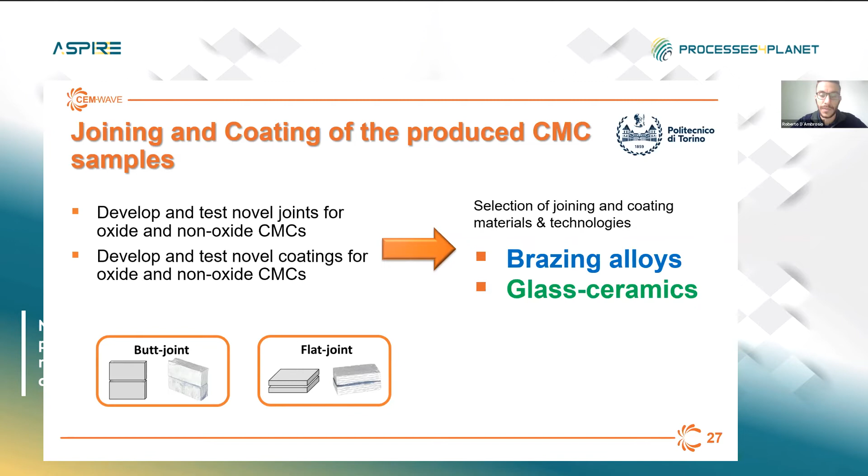Both glass ceramics and brazing alloy compositions have been optimized, selecting them in order to guarantee higher temperature softening points based on the operating conditions expected, but also high wettability and comparable coefficient of thermal expansion.

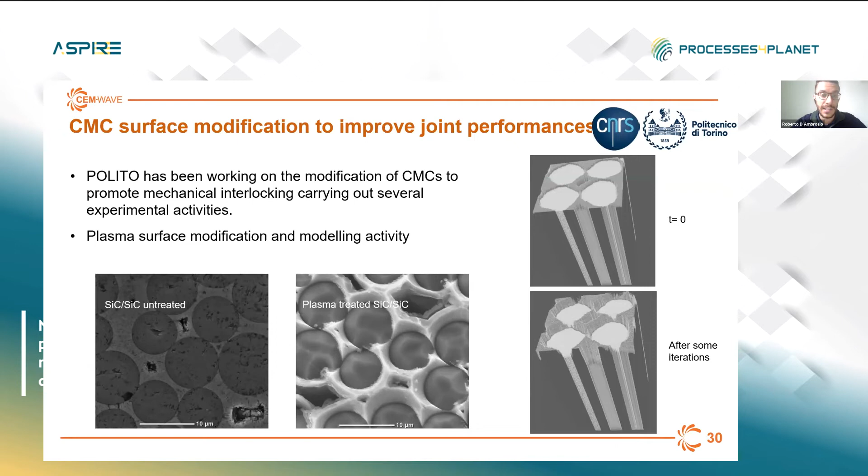This activity has also been flanked by numerical modeling activities. Finally, the last task I wanted to speak to you about regards the design of specific environmental barrier coatings in order to enhance the lifetime of the materials by improving their corrosion resistance. So two different environmental barrier coating systems have been developed, adjusting the rheological properties and the coefficient of thermal expansion to have a good match with the underlying CMCs produced.

Both of those systems were based on a multi-layer system with one bond coat and one top coat, where the bond coat was based on either mullite or zirconium titanate systems, while the top coat was instead based on rare earth silicates.

So, coming to the conclusion, in the framework of the CEM-WAVE project, our main aim was to make the application of CMCs more affordable for energy-intensive industries. We focused on a series of challenges involving cleaner and more efficient preform manufacturing technologies and infiltration processes, up to a series of technologies to further optimize their properties and have a wider application of these materials.

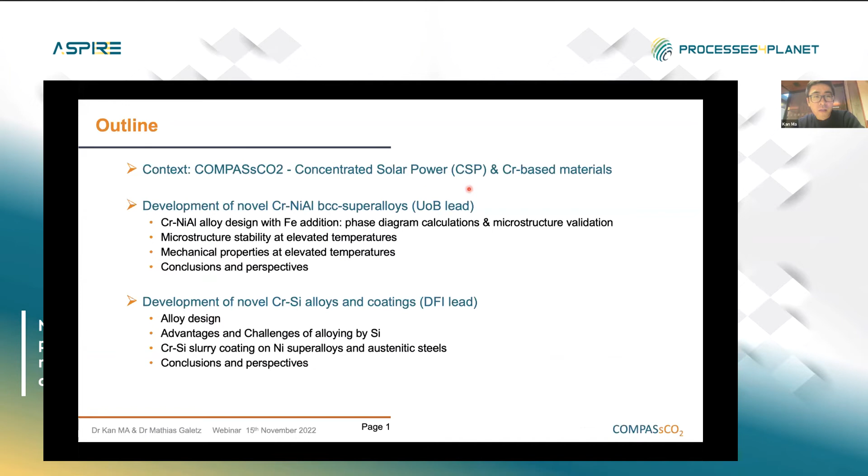First, I will start with the introduction to the project, concentrated solar power (CSP), and chromium-based alloys, followed by two different parts covering two different chromium-based materials.

So first comes a brief introduction to our project. Compass, the concentrated solar power plant, transfers solar energy to thermal energy to produce electricity. The advanced CSP aims at integrating a hot particle system as the primary cycle into a supercritical carbon dioxide Brayton cycle as a secondary cycle to produce electricity.

In this case, we can improve the temperature of the whole system to push the boundary of thermal efficiency and optimize the economic benefits.

In the Compass CO2 project, work package 3, we have focused on the development of metals for the heat exchanger tubes. The heat exchanger is the interface of the hot particles and the supercritical CO2, and this design creates a lot of challenges for the structural material of the heat exchanger tube.

For example, it needs to have high strength at high temperature, needs to be resistant to corrosion and oxidation, needs to be resistant to erosion from particles, and it will operate at high pressure for a long time. As seen in previous presentations, advanced materials mentioned include nickel superalloys, austenitic steels, ferritic steels, and some ODS steels. In Compass CO2, we have suggested another alternative to these conventional materials: chromium-based alloy.

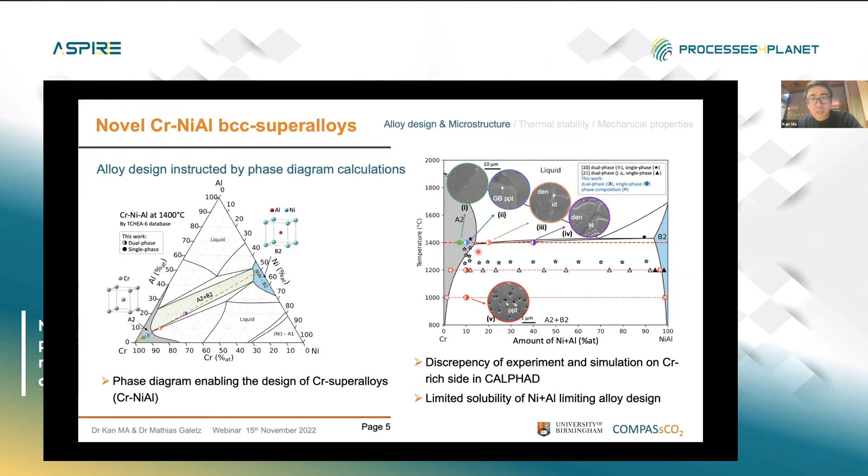And what's more, the CALPHAD database of the chromium-rich area in fact needs further investigation, because it overestimates the single phase area. That means we cannot add as much nickel and aluminum as predicted. This limits the volume fraction of the precipitate that we can create in the material, so it limits the strengthening.

So the first step is to seek a way to increase the solubility of nickel and aluminum. One way, instructed by calculation, is that we can add iron. Here we show, in black line, the phase diagram with 0 iron, without iron, and with 10 atomic percent iron and 20 atomic percent iron.

And we can see the solubility limit - the single phase area expands to the right, so it has a larger area, which is supposed to increase the solubility. Experimentally, as we can see from these two micrographs...

From this point, with iron and without iron - here we form the dendritic microstructure, but if we add iron, we form a quite homogenized single phase microstructure with this beautiful large grain.

And also, if we do a lower temperature aging in these two materials, we obtain this precipitate microstructure, and in the quaternary alloy with iron, we have a higher volume area fraction in our material, which enhances the strengthening of the material.

And after obtaining this precipitate microstructure, we are interested in characterizing this microstructure - what's the structure of the precipitate, and what's their interface?

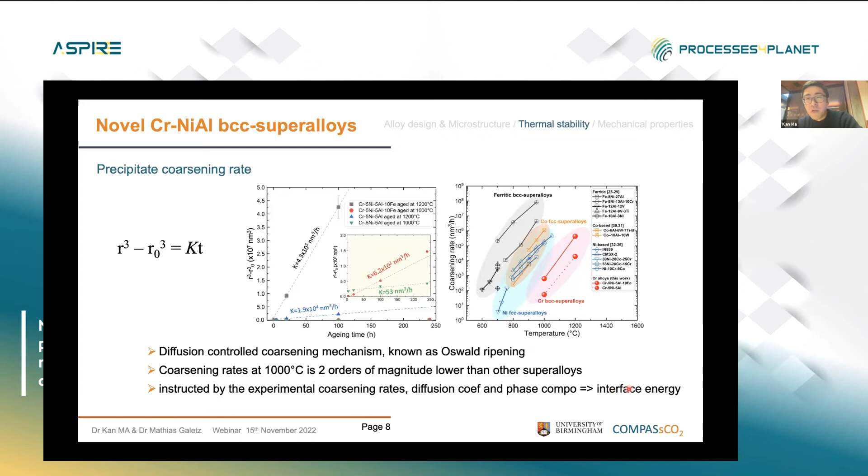And with this experimental result, we can also deduce the interface energy. There is some experimental work and some simulation work ongoing with our partner VTT to validate this interface energy measurement as well.

So finally, we are interested in the strength of this material at high temperature, and we use the high temperature compression rig developed in Matthias's group in Germany. We compress this cylinder to get a stress-strain curve and determine the yield strength of the material at different temperatures.

Here we show some results at room temperature and temperatures higher than 800 degrees. You can see the quaternary alloy chromium BCC superalloy provides high strength at both room temperature and temperatures higher than 800 degrees, which is the temperature for end-up application.

So finally, for this class of material, the brief conclusions are: the solubility of nickel aluminide is quite low in chromium and needs improvement. Also there is some uncertainty in the CALPHAD database, which needs to be improved to better predict the phase diagram.

Also, adding iron can increase the nickel and aluminum solubility, which enables a homogenized microstructure and the tailoring of the volume fraction of the precipitate, which expands the design space of the material.

And also we have identified good thermal stability of these precipitates in the BCC chromium BCC superalloy, and these all provide good strength for the high-end application temperature range.

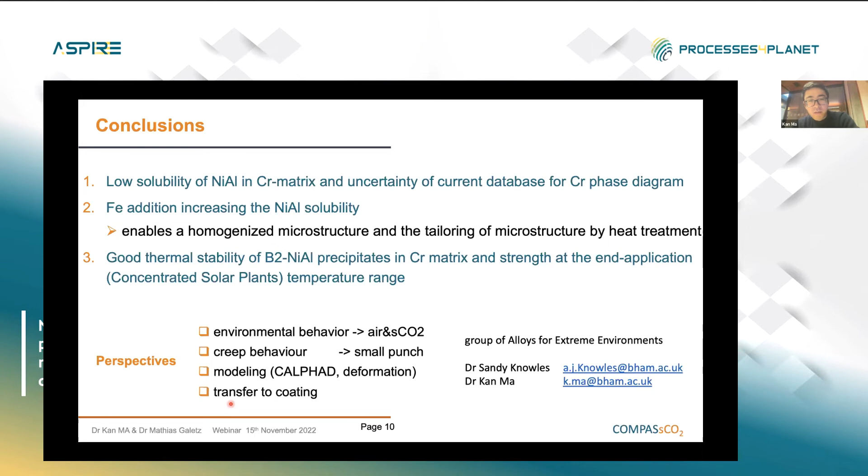And then I will let Matthias present the other part of the work.

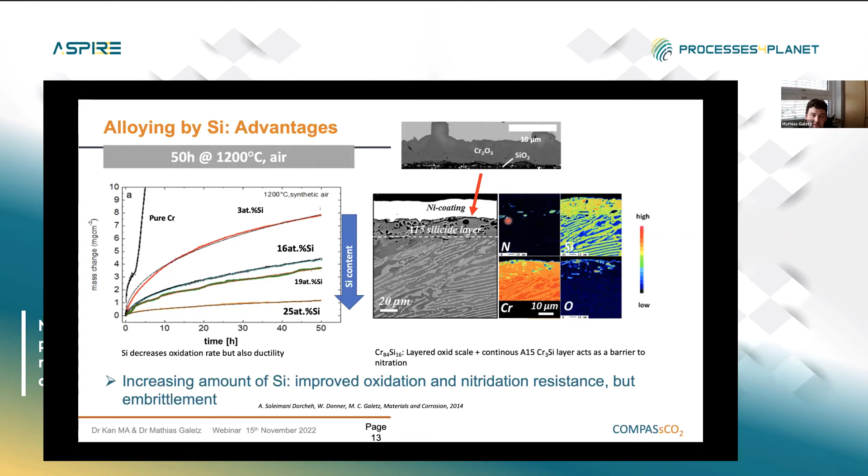And now with silicon, you can all of a sudden suppress this. So that's why research took off again around 2010, and now a lot is going on with chromium systems again, since you have methods to suppress this nitridation.

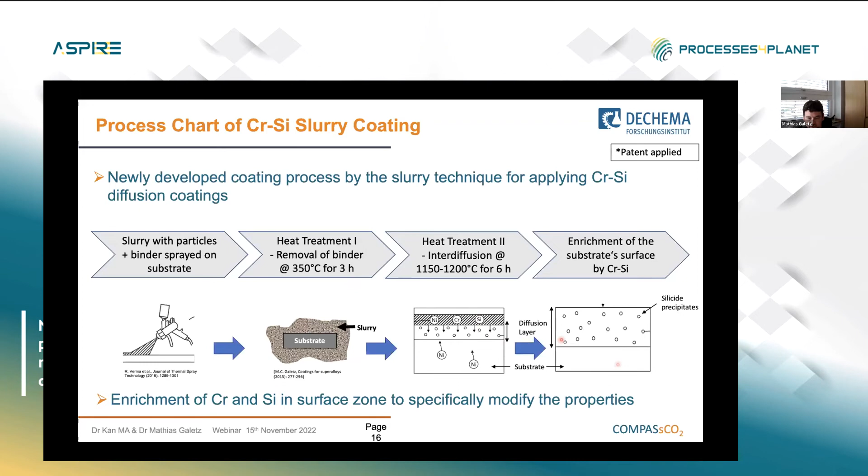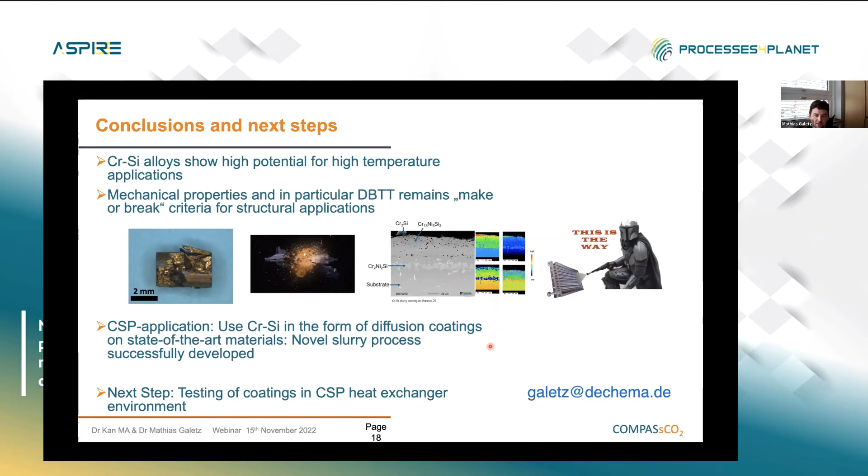So the way to go is the spraying technology of slurry coating and then a heat treatment. As you can see on the right-hand side, when you do slurry spraying, you need a lot of protective equipment to do that. But then we think we found a way to really apply these coatings on state-of-the-art materials that then can be used as the heat exchanger material for the particle CSP plants that are developed in COMPASsCO2.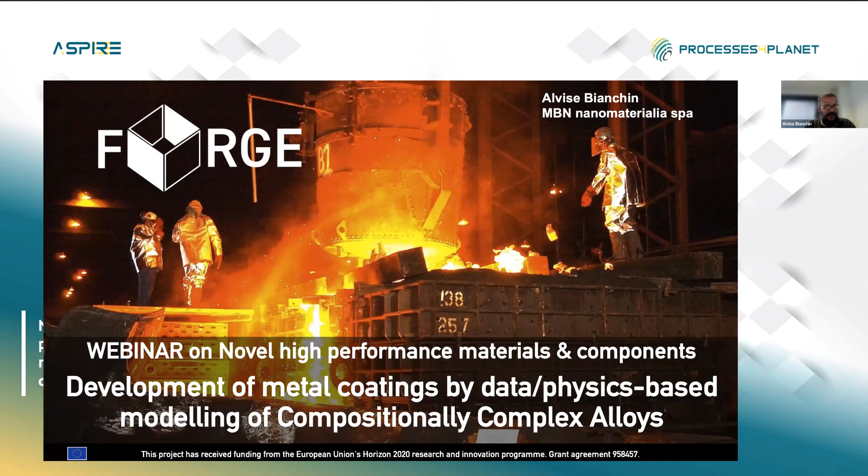So Forge is a project that is about material development for energy-intensive industries. In the consortium, we have quite a spread distribution of entities from basic research up to industries that will eventually test out our materials. This is needed because in the Forge project, we are trying to develop these new materials from the very first principles. Nevertheless, we are trying to apply them to the industry and validate them in real case scenarios.

In the project website, when you see this icon in the slides, you will find more information about the theme of that slide. So as the other projects, Forge is also focused on energy intensive industries, with the idea that with more performing materials, there will be the possibility eventually to save on energy efficiency, reduce CO2 emission, and increase the lifetime of the components.

In Forge, we are focused on specific industrial cases to guide our material development. In the cement industry, there is a lot of waste heat recovery and CO2 capture that is wanted to be improved, but there are high temperatures, high acidic contaminants, and abrasive particles that prevent the use of some materials, and in any case, cause premature erosion of the components used in that part of the plant. So for this scenario, we identified as performance targets resistance to corrosion and wear.

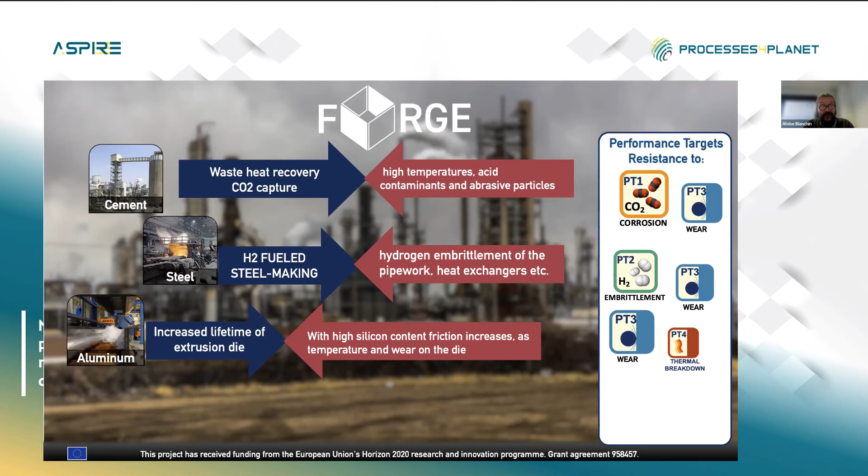In aluminum industries, we are focused on extending the lifetime of extrusion dies because higher performance alloys containing silicon are sought. In the ceramic industries, the possibility to increase the temperature of the kiln is prevented by thermal breakdown of kiln bricks.

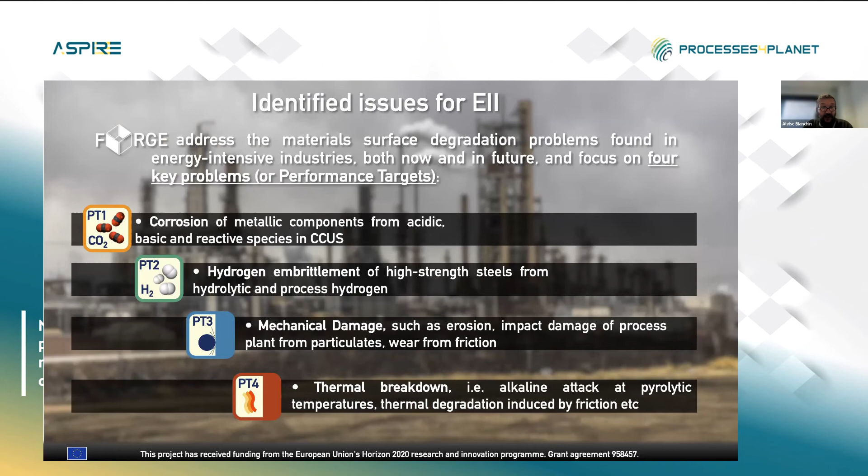This also completes our scenario of performance targets that we are looking into in the project: corrosion resistance, hydrogen embrittlement, mechanical damage by erosion, and thermal breakdown that can occur on ceramic components, but also alloys. This identifies basically our space of investigation, in which we have materials, different performance targets, and different manufacturing processes.

In particular, we are focusing on four manufacturing processes related to the manufacturing of coatings: HVAF, HVOF, cold gas spraying, laser cladding, and the four performance targets identified before. The idea of the project is to explore the space in order to find the possible combination of materials and processes that satisfy the performance targets for the different use cases.

So at the end, we will end up not only with a specific solution from the material and process point of view, but also with a knowledge base of methodologies and data sets that will help us replicating this experience for other sectors or for other performance targets. So this is the core idea of the Forge.

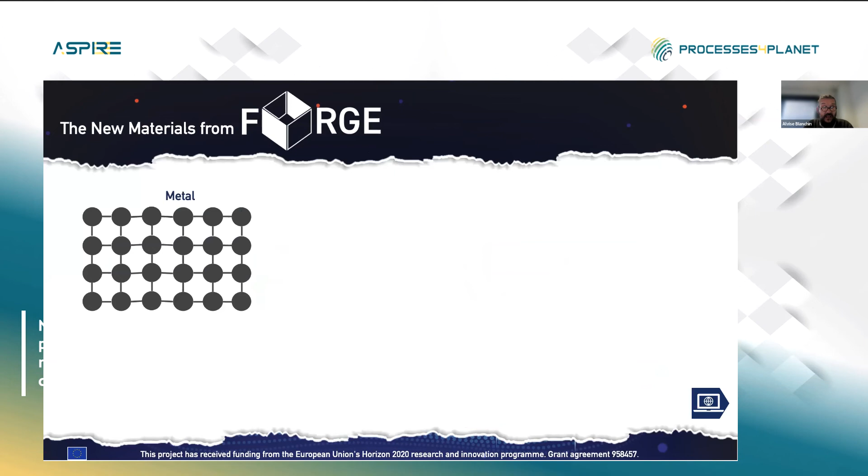It's a quite complex approach, and in Forge we are embracing these complexities because we are not looking into classic metals and conventional metal alloys with a primary element and substitutional or interstitial elements. We are looking into compositionally complex alloys with a much broader definition: there is no dominant element, more than 4 elements are present with concentration from 5 to 40 atomic percent, and more than one phase can be present.

This can give some benefits. We are using compositionally complex alloys as the framework for high configurational entropy, which can provide unique mechanical properties, good corrosion resistance, and the possibility to tailor new combinations of materials and be more flexible on the specific uses of the materials.

In order to identify a good compositionally complex alloy, we need to constrain ourselves to some elements to be included in this scenario. In Forge, we identify these elements, removing those that are less usable or not worth considering at the moment. But even with this smaller group of materials, it's difficult to have a complete and systematic development approach. It can be an impossible task given the countless compositions possible, as we have seen in other presentations.

So the Forge approach is to be supported by a deep learning algorithm, able to correlate the properties of the compositionally complex alloys with the composition. This is done starting with an input data set, developing the algorithm that gives a prediction, and this prediction has to be validated against an experimental campaign that will provide an output data set. This needs to be reiterated to further refine the algorithm output.

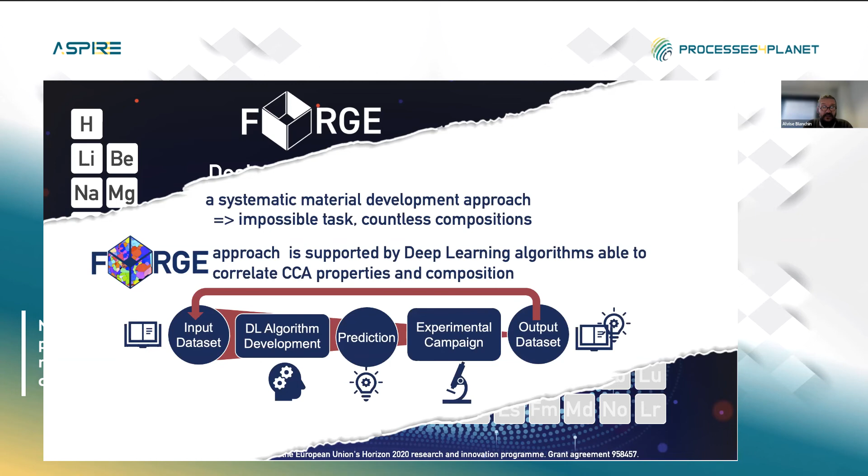So clearly, the starting point for this exercise is data from open repositories and data from other experiences in the literature for high entropy alloys and compositionally complex alloys. From this, we can get information on composition, sometimes the phase measured, something related to the production methods, and most importantly, the performance we are looking into, in this case hardness.

These data have been integrated with data coming from physical modeling methods in order to provide the data set with more complete information on the specific composition, and also integration with other parameters calculated directly from the composition. So we had to use CALPHAD connected with Python systems in order to provide for a huge data set information of this type.

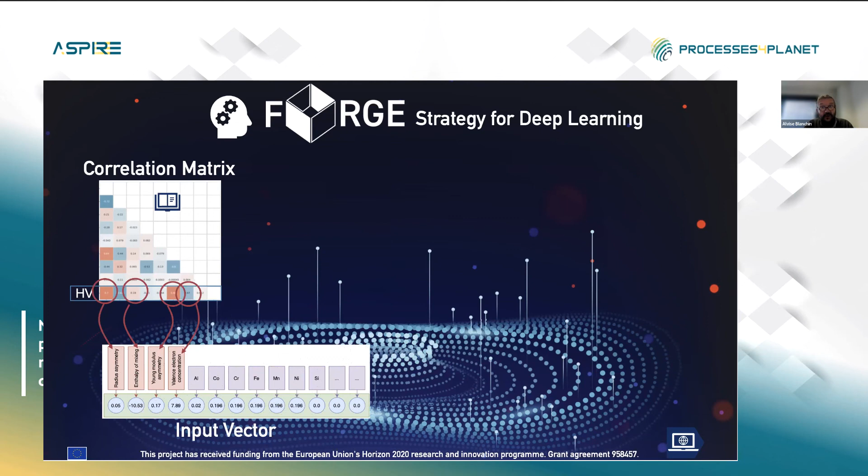This information has been used to obtain a correlation matrix that is able to identify which information is more related to, in this case, the hardness value. Given this input vector, this is the starting point for the deep learning, which with training data can do some prediction of the model.

The system that we are using in Forge also gives the possibility to relate back which is the most contributing factor to the specific property. So in the case of hardness, we can identify which is the most contributing factor for the specific hardness of this alloy.

But we cannot stop here. So after the first loop of activities developing this deep learning algorithm, we checked the system by induction melting, and then a second iteration by physical vapor deposition, to eventually arrive at coatings obtained on real components. We use this approach because the first iteration helps assess that the algorithm is on a good path. The physical vapor deposition allows us to get more data points around the main composition we are interested in, and the last step is the one closer to the application.

The information gathered at this stage will be directly related to the possible application of similar materials with similar techniques, but to other use cases.

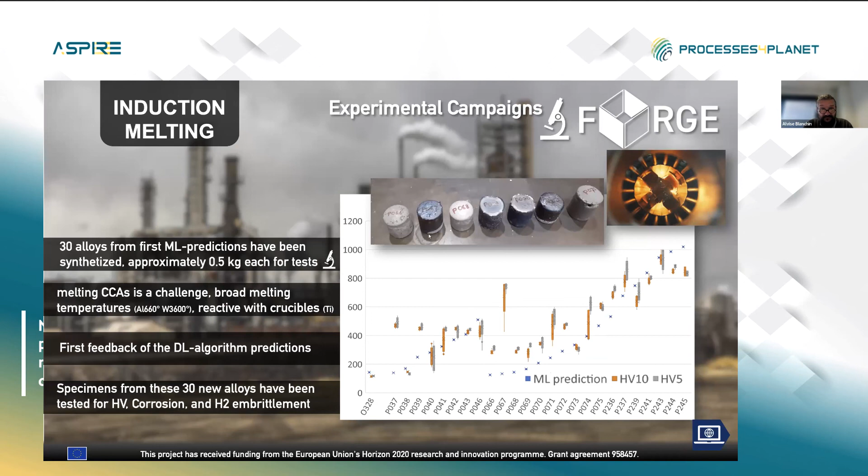Based on that, the machine learning has been refined, and more specific material libraries with a smaller subset of elements have been obtained. This technique allows using gradients from the different targets of the PVD, allowing different points in the deposited wafers to have slightly different composition.

We had to develop dedicated physics models that can maximize the congruity between the physics in the PVD and those in the bulk. Otherwise, there could have been incompatibilities with the final system, but this system has been very useful in providing a base for the data set to grow further in the deep learning.

The last step was the mechanical alloying and the production of the feedstock material for the thermal spray techniques. We chose mechanical alloying because it's somehow more flexible in the production of new systems. You don't have to rely on fusion with different melting points, so the output is also quite directly usable in the thermal spray sector.

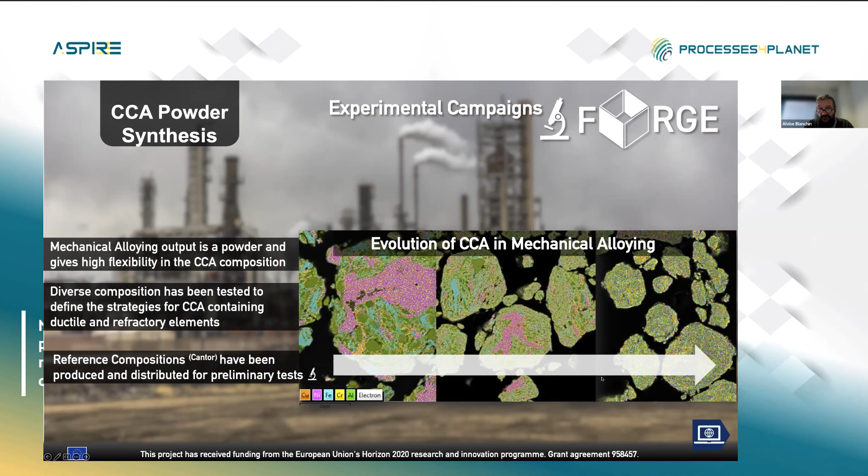So here becomes a bit more clear also my involvement in this speech, since MBN, the company in which I'm working, is focused on mechanical alloying at industrial level. It's a small company, and we are bringing this technology to different outputs, from lab scale to industrial scale.

Mechanical alloying works through a combination of fracturing, cold welding, and locally heating the particles during the process, allowing many different combinations of effects: the creation of nano and microstructure, the performing of non-equilibrium metallurgy, dispersion of oxides in metals. And we have the possibility to refine the powder output for the different thermal spray processes.

Here are some examples of structures that have been obtained in the past, not only related to Forge, but in general with this technique. The possibility that we have is to work with base metals that are iron, nickel, titanium, copper, or aluminum. This means that the same thing we can do on iron-based systems can be done also on these other systems. Our role in Forge is exactly this one.

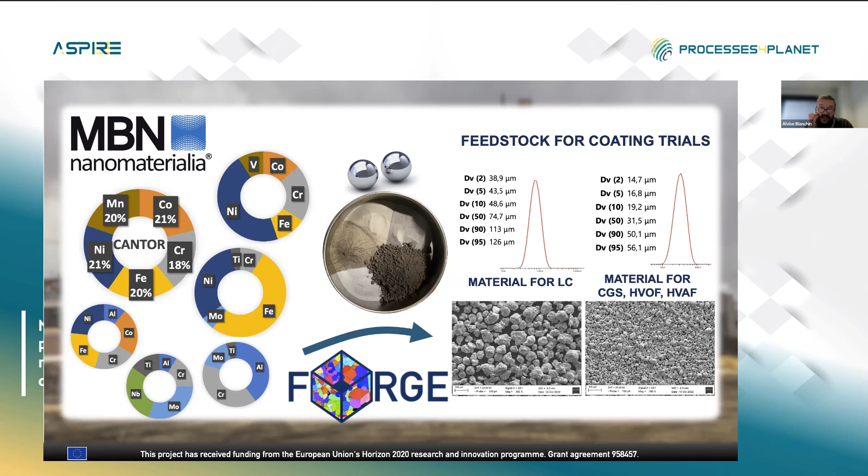And we are now at the stage where we are actually getting information from the coatings, assessing which are the best parameters for the thermal spray process. That is another layer of uncertainty, or complexity, related to this kind of development.

By having these trials on thermal spray, we are gathering samples at different process conditions that are tested for the performance targets I was describing before. In particular, these are tested for wear, and these are also the final input data set for the deep learning algorithm, which should eventually be able to provide useful information also for other material systems and other application scenarios.

We are testing these coatings also for hydrogen embrittlement, corrosion, and thermal breakdown, and all this data contributes eventually to this knowledge-based system framework.

So, conclusions, but also somehow messages. We have seen that developing new materials requires a combination of different approaches, not only deep learning processes. The creation of a data set for these algorithms has to be based on experimental data in order to be more consistent with the final outcome.